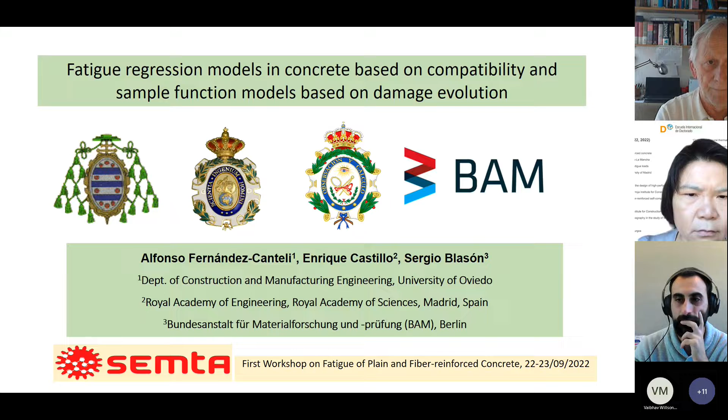As an index, I will introduce the problematic, and then present the phenomenological model of independent random results, which are based on regression and compatibility, particularly the basic SN model.

Then, as a counterpart, the phenomenological stochastic models of cumulative damage evolution, followed by some examples of application for both fatigue and fracture phenomena, and finally some very short concluding remarks.

The problem of the fracture mechanics characterization of plain and fiber concrete is difficult because this material is quasi-brittle, and so the weakest link principle is not valid to be applied in general.

The fracture process zone plays an important role in the establishment of the size effect, for instance, which was interpreted by Bazant as an intricate, size-dependent problematic definition of concrete strength.

There are different arguments to justify the use of fracture mechanics in the case of concrete and plain and fiber concrete, such as energy criteria, crack propagation, the necessity to avoid ambiguity in results interpretation, size effect, and so on.

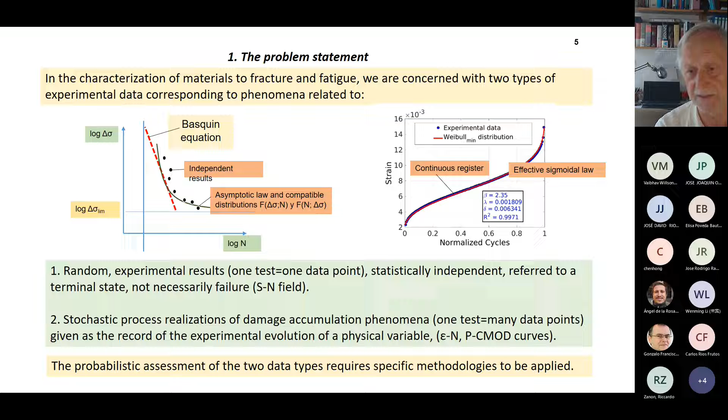In this case, we are handling, for instance, the epsilon versus N curves, or the P-delta curve, or the P-CMOD curve for this.

So in the first case, we consider it necessary to apply regression models, which are based on the compatibility between the distribution for the number of cycles given delta sigma, or the distribution of delta sigma given the number of cycles.

In the second case, we can apply a phenomenological model to define sample functions which, when normalized, can be identified as cumulative distribution functions.

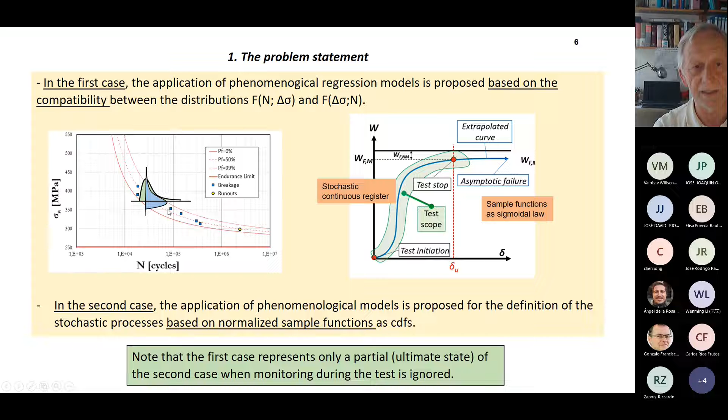Note that the SN field is a particular case of the second approach, because there the use of monitoring could be ignored and attention concentrated only on the terminal results of the test.

According to this, we propose the use of phenomenological models as justified by Freudenthal, which consider that by applying the fundamental rules of the theory of probability, many of the experimentally established relations between the principal variables can be theoretically deduced from the purely formal assumption of the existence of a statistical distribution function, in this case applied to cohesive bonds.

It is to note that Freudenthal is widely regarded as the founder of the field of structural safety and reliability, encompassing both the theories of probability and statistics and the theories of mechanics.

According with this, we propose to handle three cases. First, the assessment of the SN field. Second, the fatigue compressive test. And finally, the P-delta or P-CMOD test.

These evaluations are important because they provide information which can be used or must be used in the practical fracture and fatigue design analysis of fracture energy, scale effect, and also in the application to cumulative damage calculation.

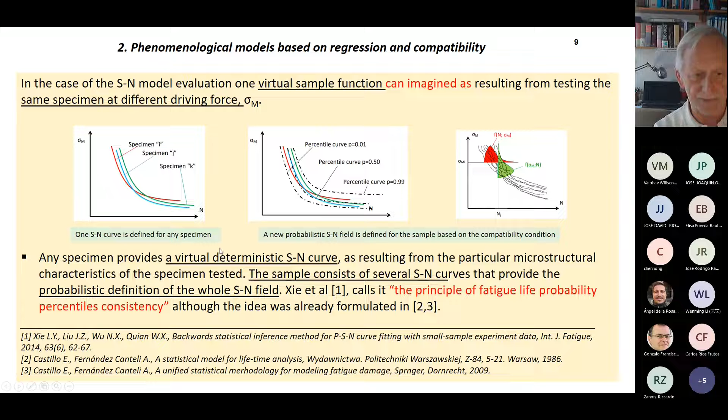So for each specimen we get a deterministic virtual SN curve, and from this set of curves for the sample we can determine the percentile curves for the whole SN field. This is what Xie et al. calls the principle of fatigue life probability percentile consistency, although we had already formulated this in 1986.

For the derivation of the model we have to consider the following conditions: physical conditions, which imply a limited tension range, delta sigma, and normalization to be applied for the different delta sigma levels in the principle of the weakest link.

But at the same time we also need to fulfill statistical conditions which imply dimensional consistency in the normalization, in order to accomplish the reciprocity principle implied in the accelerated test.

Then we also need to fulfill a stability condition in order to satisfy the location and scale transformation.

The limit behavior implies that we have to use an extreme value family, and we don't need to discuss which is the real distribution for the particular material tested, because we are only interested in low probabilities of failure. Asymptotically, any statistical distribution must be represented by one of the three extreme value distributions: Frechet, Gumbel, and Weibull.

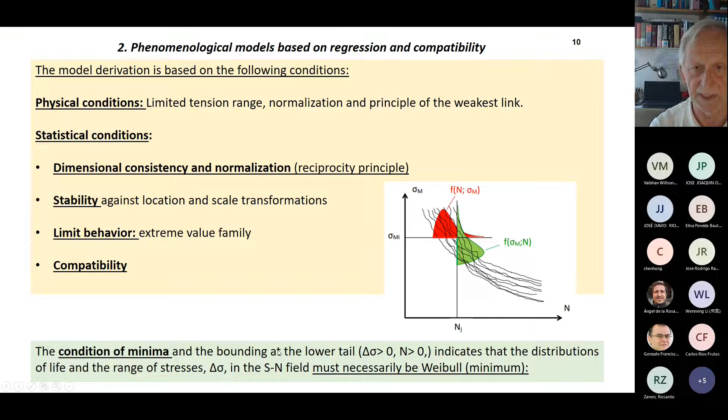Only two examples of the consideration of the compatibility, as presented by Freudenthal and Gumbel. This is exactly the publication of these authors, and the same of Bolotin, considering the compatibility, which is the necessary condition that the SN field must accomplish.

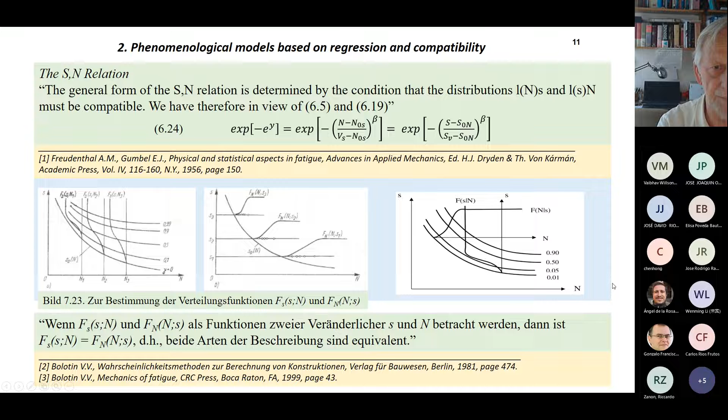So the question is that if we have a Weibull distribution as represented here, we can consider that lambda is only a function of the number of cycles in the case of the representation of the vertical distribution. In the case of the horizontal distribution, lambda and delta, the location and scale parameter, and the same for the shape parameter, must be only a function of the driving force delta sigma.

So by applying the compatibility, a functional equation results, as represented here, and the only assumption we have made is that the shape parameter must be the same in both cases. The solution of this functional equation, which is a part of the mathematics that could be considered in parallel to the differential equation, provides only two possible Weibull models for minima.

These are model 1 and model 2. But model 2 is degenerated, because the zero percentile curve is evolving to be the asymptote of this.

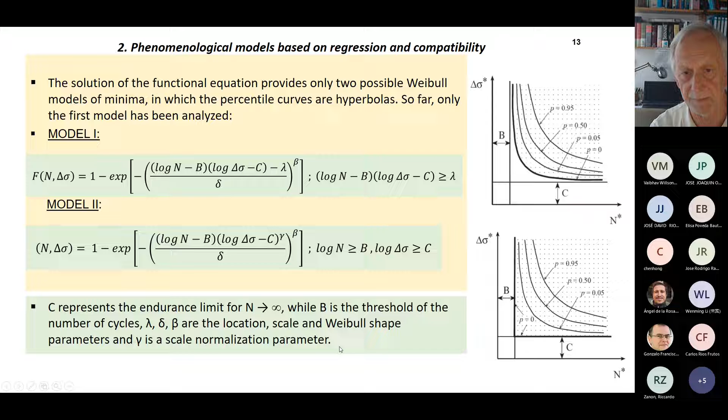In the second case there is another scale normalization parameter, but we will only consider model 1 as possible for this. So the model parameters are estimated in two steps.

The first step is estimating the asymptotes, and according to this we can normalize all the results in this way using the normalized variables, which is interesting because it summarizes all the information represented in the SN field as a single variable distribution, irrespective of the driving force.

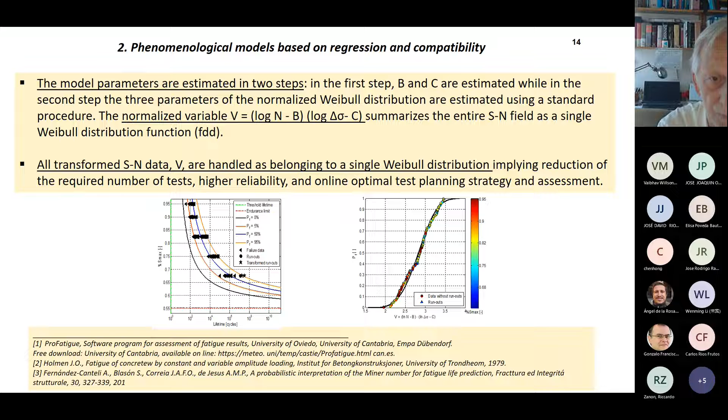We can assess all the results together, represented by a single Weibull distribution. This implies a reduction of the required number of tests, higher reliability, and the possibility of an optimal test planning strategy, as Sergio Blasón will present in the following presentation.

So we can relax the condition of the Weibull distribution, assuming the Gumbel, which is in transition between the Weibull and the threshold, when the shape parameter is higher than 6. In this case, we have a reduction of one parameter in the model.

The size effect can be considered included in the model in a very easy manner, although in the case of non-uniform distribution in the specimen, we have to resort to other models.

The runouts are included in the parameter evaluation using the expectation and maximization algorithm, and then the confidence interval of the percentile curves in the SN field may be estimated by applying the bootstrap method or using Bayesian techniques.

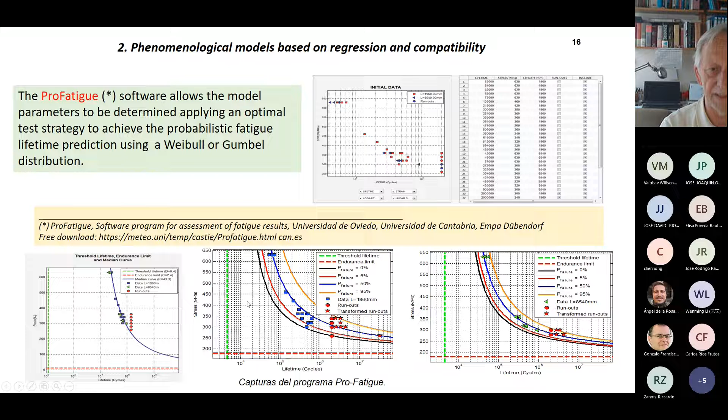According to this, we prepared the ProFatigue software, which allows the model parameters to be determined. This will be discussed in detail by Sergio Blasón.

This is only to mention that this model, called the basic model, has some weaknesses, as for instance, due to the absence of the upper limit of delta sigma, contradicting the existence of an ultimate stress sigma u, and the interpretation of the B parameter is not easy or fully understood, although Bolotin's model presents a similar parameter derived from micromechanical considerations.

This model is derived for constant stress level condition, for instance, for R constant. When the life prediction is intended for different stress levels, we have to extend the model. And the same when the non-uniform stress distribution in the specimen requires to be complemented with a generalized local model. All these problems have now been addressed using what we call a general model, which overcomes all the limitations of the basic model.

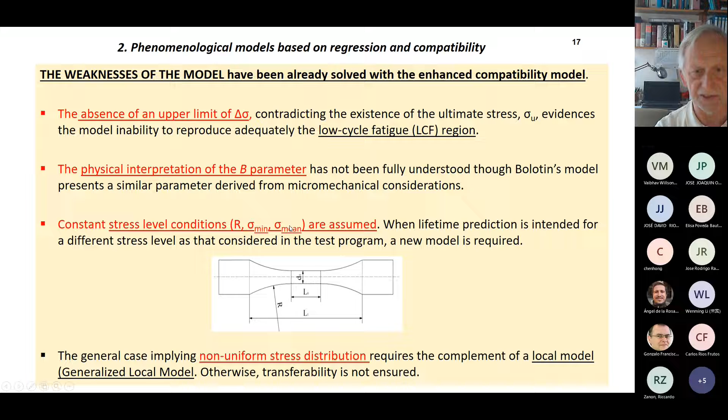And finally, only a reference, we can not only represent or apply the SN field for the delta sigma, but we can consider any generalized reference variable, for instance in multi-axial fatigue, as the Smith-Watson-Topper, Crossland, Fatemi-Socie, anyway, because they are based on the compatibility condition, and this compatibility condition is applicable to any material and also to any reference variable. It means any driving force.

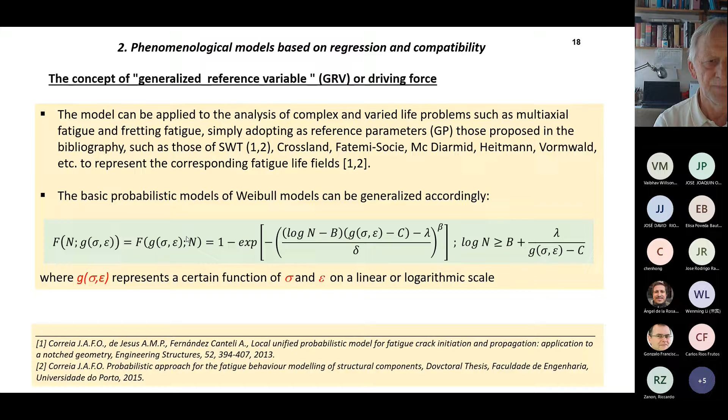So, according to the program, we are now discussing the phenomenological stochastic models of cumulative damage. The evolution of many cumulative damage phenomena, as for instance fatigue, fracture, wear, creep, etc., usually exhibits sigmoidal shaped curves, which are related to different physical magnitudes, as I mentioned, for instance vacancy concentration, acoustic emission, deformation, anyway.

Developing fatigue fracture phenomena phenomenologically has many advantages, because we can establish the fundamentals of the phenomenon based on a statistical basis.

We can profit from the experience already existing from statistical theory in this kind of function. We can derive simple analytical expressions which permit the interpretation, the physical interpretation of the parameters.

And we can also recognize the twofold character in cumulative damage when we are only analyzing the terminal reference state of the variables. In this case, we are predicting when the failure occurs, but we can also be interested in analyzing the evolution of damage in the fatigue process or the fracture process.

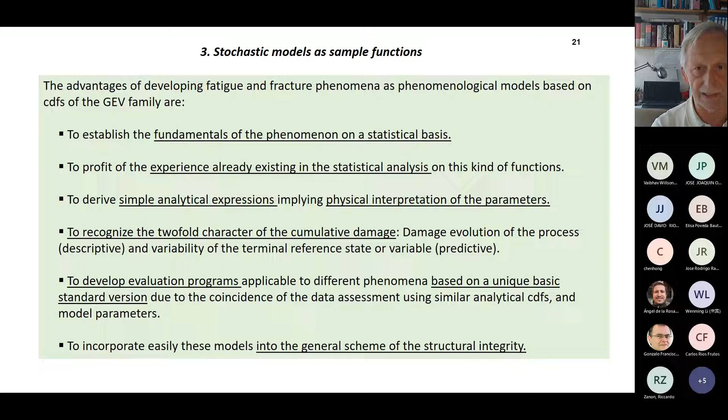So the proposed methodology consists in recognizing the lower bound and the upper bound of the record of the test. We have to consider adequately which are the scales in both the main variable and reference variable defining the phenomena. It means the logarithmic or the linear scale can give very different views of the phenomenon.

Once we recognize these both bounds, then we can use the normalization to transform the problem of this sample function into a cumulative distribution function, because according to statistical theory, the cumulative distribution function can be defined as a function moving from 0 to 1, in which the evolution is always increasing, monotonically increasing. Then automatically this can be defined as a cumulative distribution function.

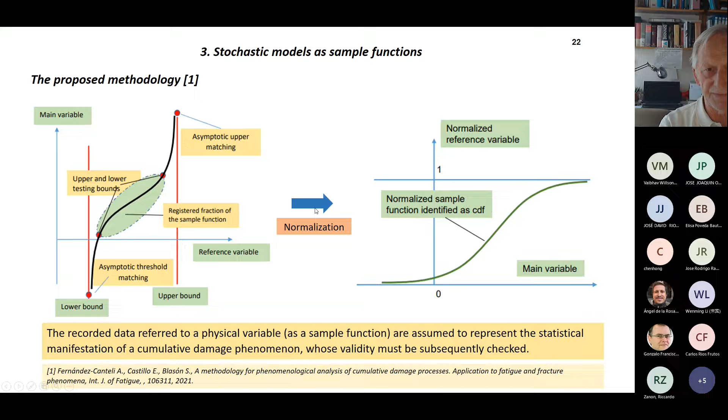Then the question is, which family can be used for representing this cumulative distribution function? In this case, we use three examples of application to define the problem we are discussing. The first one is the assessment of the fatigue results and definition of the SN field.

As mentioned, we use these models based on compatibility, which are regression Weibull models. The aims of this model are the following: first, to define in a probabilistic way the SN field, which is only referred to the ultimate state, which is usually the failure.

The second aim is that this conforms a basis for the probabilistic cumulative damage calculation. Without a probabilistic definition of the SN field, we cannot define the cumulative damage in a probabilistic manner. Then it is also interesting to get from the model the endurance limit, because we don't introduce in the derivation of the model the condition that the endurance limit exists. This is a requirement given directly from the functional equation.

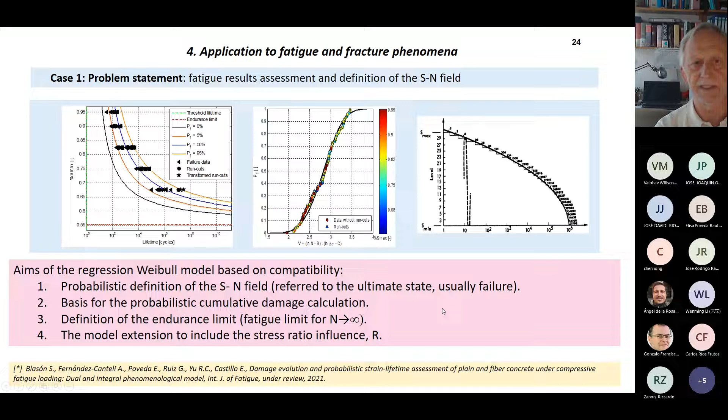Then it is also interesting to extend the model to include the influence of the stress ratio. According to this, this will be handled by Sergio Blasón in his presentation in detail, giving an idea about the advantages implied in the model.

In the second case, we are interested in analyzing the strain evolution in concrete under compressive fatigue loading from a dual perspective: one, only considering the prediction of the statistical distribution of the terminal state, and the other, the definition of the stochastic sample function for the different specimens. We are using the work of Poveda et al. in order to perform this study.

The aims in this case are, first, definition of the damage evolution and to extend this to any stress level of the SN field. In this case, we only dispose of results at a certain level, but with the normalizing property of our model for modeling the SN field, this can be extended to any stress level.

In this case, we have some experimental results, and this is the fitting using this methodology, which can be considered practically perfect. For different specimens, we find a certain scatter in the curve, so we need also to establish the ultimate distribution of the failure, and we can finally define the cumulative distribution function of this expected lifetime according to the Weibull model.

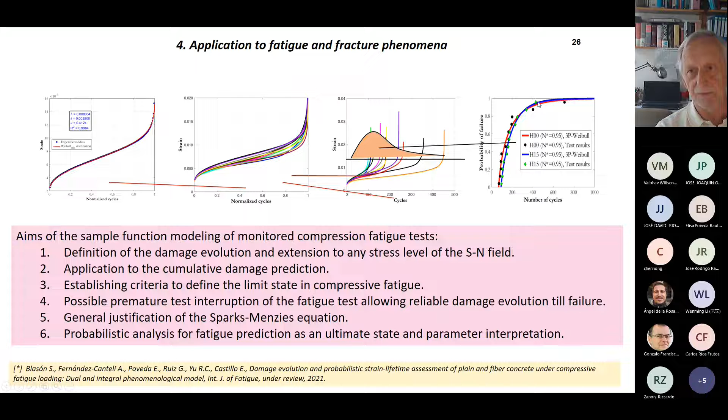Finally, this is the probabilistic analysis, as I mentioned, the distribution of the failure, according with the Weibull model. These are the results as an example for different steel fiber reinforced concretes and for different degrees of reinforcement. We see the quality of the fitting and also the scatter, which must be statistically handled to predict a representative damage evolution for the next specimen we test.

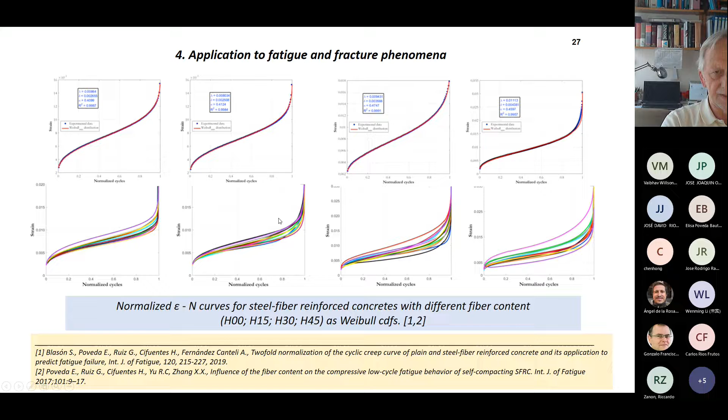So the complete assessment, as a dual approach, encompasses the analytical definition of the damage evolution, the probabilistic analysis of the SN field, and the probabilistic distribution of the single parameters. This means that if we repeat with different specimens, we can observe the distribution, the variability of the model parameter, with the advantage that these parameters are physically represented.

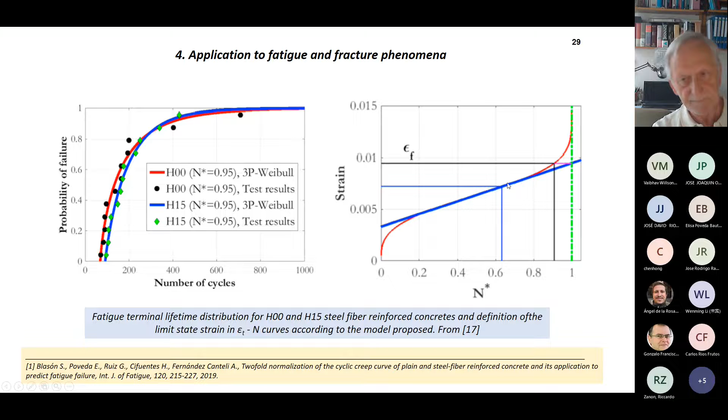Then, the restoration and prediction of the damage evolution in the running test allows this premature interruption. And we can see here the region where the Sparks-Menzies equation is applied.

Finally, this is not a fatigue case, but a fracture phenomenon. The asymptotic fracture energy and the specific fracture energy are determined by a test, a P-delta force test, or a CMOD record, which is censored at a certain point due to the test condition.

The importance is not only as a fracture, because it provides information, for instance, related to energy, which can be used afterwards for the fatigue design.

The aims of this phenomenological model are the analytical definition of the complete curve, not only from the one provided by the test, the interpretation of the model parameters, and defining the fundamental properties of the fatigue and fracture behavior, then a more reliable calculation of the specific fracture energy, because we are fitting all the curve and not, as we will see, only fitting from the last point of the curves at the interruption of the test.

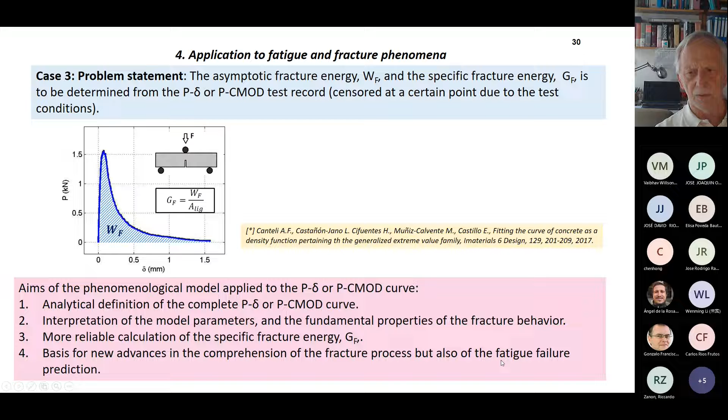And then we consider that this constitutes the basis for new advances in the comprehension of the fracture process, and therefore also to be used in the fatigue prediction.

In this case, we consider the sigmoidal shape of the energy in the advance of the test, and then with the normalization, we can consider that this sample function is a cumulative distribution function.

In fact, we are not directly using the energy, but we are considering the PDF. It means not the cumulative distribution function, but the frequency distribution. And this frequency distribution has an area equal to 1.

And then in this case, we can, using only 4 parameters - the 3 parameters of the distribution we are looking for, which happen to be a Fréchet distribution, and the other one, which is scaling the area so that the complete area under the curve must be 1, as statistically required.

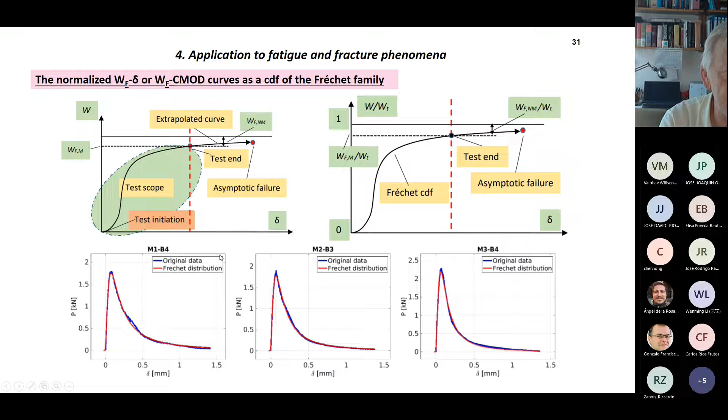And then we consider that the integral of the curve, the area under the curve, is extended to infinity.

And then according to this, the generalized extreme value family is considered in order to see which is the reliable or the suitable family of curves to be used in this case. We perform the considerations using Weibull, Gumbel, and Fréchet, and the Fréchet proved to be the adequate one.

This is possibly because the distribution of the curves - the tail of the distribution - must be, in this case, conditioned by a distribution which has a minimum, but is a threshold for maxima, which is bounded in the lower part of the curve, and then goes to infinity.

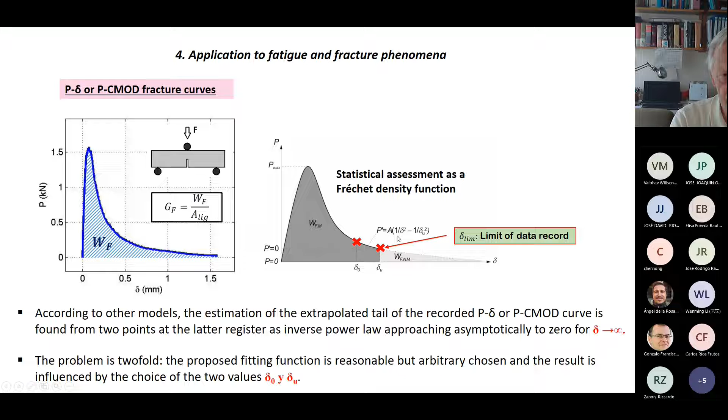And after the optimization of the parameters, we find an alternative to the current procedure, which is based on assuming an inverse power law curve for completing the part of the interrupted test in the laboratory. Instead, we are defining the complete curve, and therefore the extrapolation we consider must be more reliable than the current procedure used.

And the other question is that usually we can consider that this must be an inverse power law evolution of the energy, but according to the equation obtained with the Fréchet distribution, we see that it must be a combination of a power law and an increasing exponential tending to unity. It means that the Fréchet distribution is composed as a product of one increasing exponential tending to 1 and another power law which is reducing from infinity to practically zero.

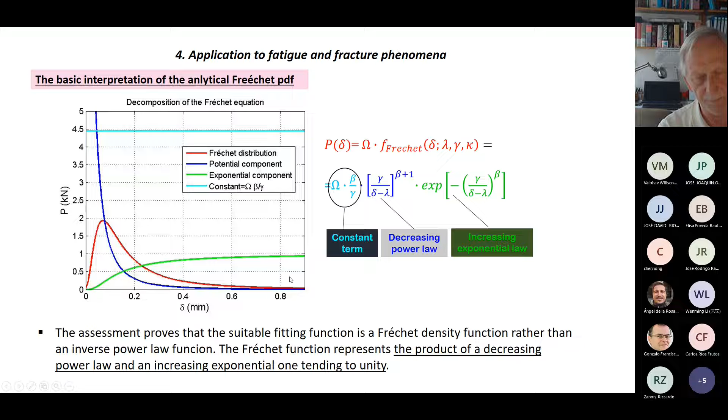And this must be perhaps giving us some information about the process which can also be applied afterwards in the evolution of the fatigue process in the material. And so as concluding remarks, this is only referred to the last.

So the proposed model should not be understood as a simple fitting proposal, but rather should be understood as a sample function which can be, once normalized, identified with one of the extreme value family distributions, which represents in some way the microstructural response of the material in the fatigue and fracture process.

So the information collected in the test record sometimes represents only a small fraction of the complete damage phenomenon. But because we are identifying this with a cumulative distribution function, the procedure can complete this curve, even if we are considering only a fraction of the complete procedure.

And then sometimes, because the shape of the cumulative distribution function is determined by the shape parameter, when the Weibull parameter is less than 2 or even less than 1, we have no sigmoidal shape of the cumulative damage sample, but this only serves to justify phenomena which are not observed as sigmoidal shape phenomena.

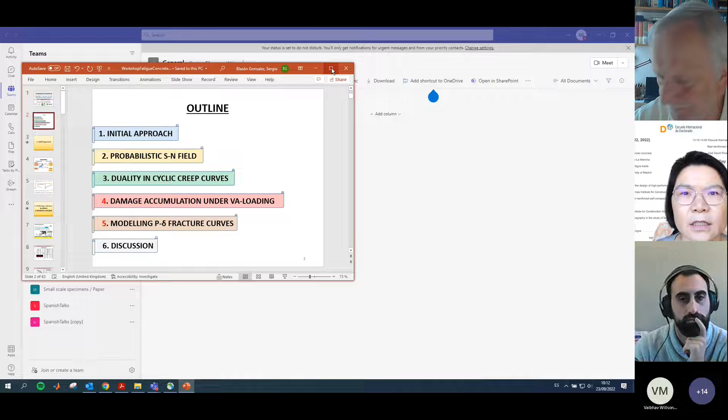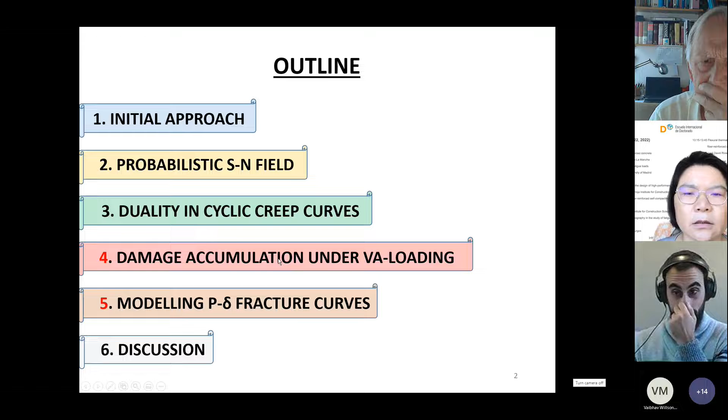Thank you, Rena, for your introduction. Can you watch my screen? Perfect. So, first of all, sorry, because I changed a little bit the original title of the talk, because we were talking about evaluation using MATLAB, but it's not necessary to use that software in order to evaluate the data. Basically, this talk is a continuation of the previous one by Professor Fernandez Canteli.

The intention is basically to apply the phenomenological models that he was introducing in the first talk. And of course, I should remark that this is a working cooperation not only with Professor Fernandez Canteli, but also with Professor Enrique Castillo.

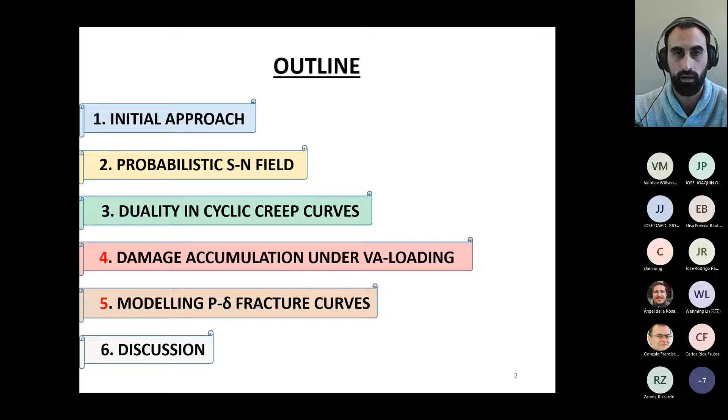Well, this is a summary of the talk. Firstly, I will introduce shortly the topic, and then I will give you some examples of how we use the S-N model in order to evaluate some experimental data. Then I will go to the duality in cyclic creep curves. I don't know if we will have time to go into the fourth and fifth topic, the damage accumulation under variable loading, and also the modeling of P-delta fracture curves.

But in any case, maybe I can give you some small slides, and then we can talk about it during the discussion time. According to the topic, as Professor Fernandez Canteli mentioned before, we defend the interpretation of fatigue damage under two different perspectives. The first one is when we don't have any information about the evolution of the damage during the fatigue test, for example — I'm looking for the pointer, sorry — when we don't have any information about the evolution of the damage, which could be referred to the crack size, the emission, acoustic emission, the strain, or whatever.

Then we are only able to evaluate the terminal state. It could mean basically the failure, or maybe some particular limit state that we can define in advance. On the other hand, when we can monitor the evolution of the crack size, the strain, or whatever, we can do a complementary evaluation of the data, and this is more or less what we will see in this presentation.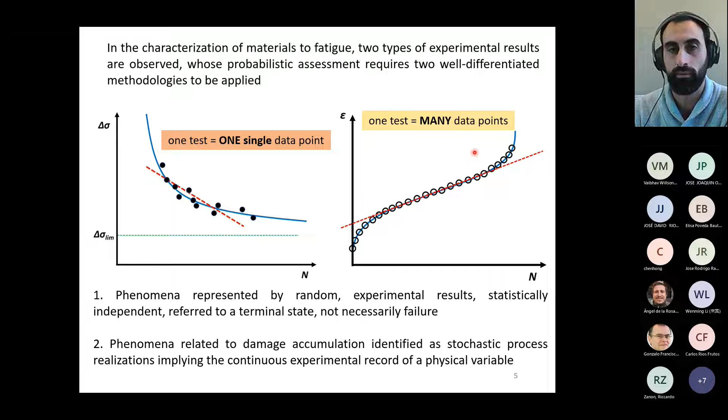For example, one example of the terminal state evaluation is the typical SN field, when we have many data, but we can say that every single test refers to only one particular point. So this means that, for example, we analyze this particular data under some specific stress level, and then we basically record the number of cycles till failure. We can do the same with the rest of the experimental data. On the other hand, when we can, for example, monitor the strain level along the cyclic creep curve, we collect basically many different points along one particular test. So we will see in this presentation the methodology that we propose to evaluate each of these approaches.

First of all, I will explain how to evaluate the SN field from a probabilistic point of view by using the model that was explained by Professor Fernandez Canteli before. In this case, the model is implemented in a software called ProFatigue, and I will give you some details about that in the next slides.

But in order to show you how to use the software and how to implement the model with some experimental data, I would like to take advantage of the experimental data collected by Holmen more than 40 years ago. I think also Professor Ruiz mentioned this work yesterday in the first talk. He collected a lot of different results using plain concrete specimens. In this case, I will be focused on the specimens which were tested under constant amplitude loading. He was analyzing two different kinds of tests. The first one referred to S-min equal to a constant value, so basically we can accept that the load ratio in such cases was practically zero, so constant.

On the other hand, he was also evaluating some specimens under the same mean load. But in this case, the loading ratio was not constant, so I will refer only to this first case.

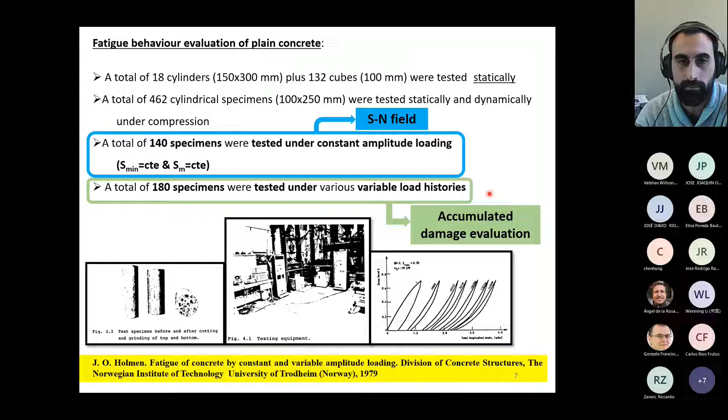Basically, these were the results that he got when using the plain concrete specimens under the same minimum load during the test. He was using a frequency constant of 5 Hertz. And here you can see the stress level, referred to the compressive strength of the material.

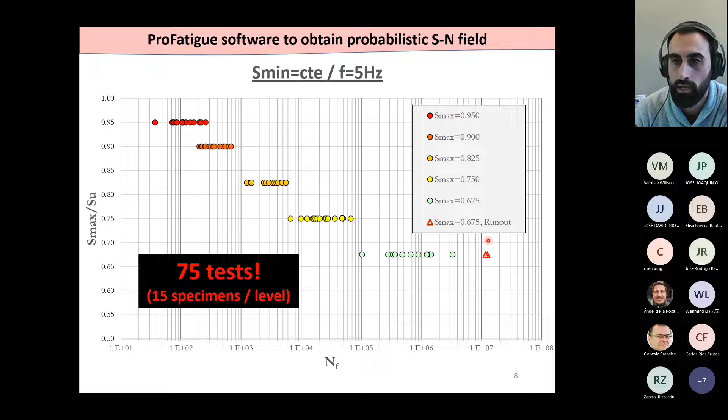As you can see, there are many experimental data. In total, 75 tests were tested. He got basically 15 specimens per each single loading level. Here you can see the numbers referring to the loading level. And in the lowest loading, 3 specimens were not broken. That's why we refer to them as runouts.

According to the typical models implemented in many guidelines and standards, we can basically analyze the data using a simplistic, in our opinion, model that consists of a linearization of the relationship between the lifetime and the stress level. If we consider the lifetime in a logarithmic scale, we can use a linear relationship between the number of cycles and the stress level.

According to this, we can get an analytical expression that we can transform into a straight line, just by taking the logs. We can more or less identify the mean value of the life according to each level, but from a design point of view, we think that it's not practical or useful, because usually we don't take care about the mean value, but we should refer to the minimal percentage of failure, because of course we cannot think about a component with a percentage of failure around 50%.

Of course, we should minimize the probability of failure. That's why we should always take care about the minimum lifetime that we can expect under some particular loading level. So that's why we are a bit skeptical about this kind of analysis where we are focused on the mean value.

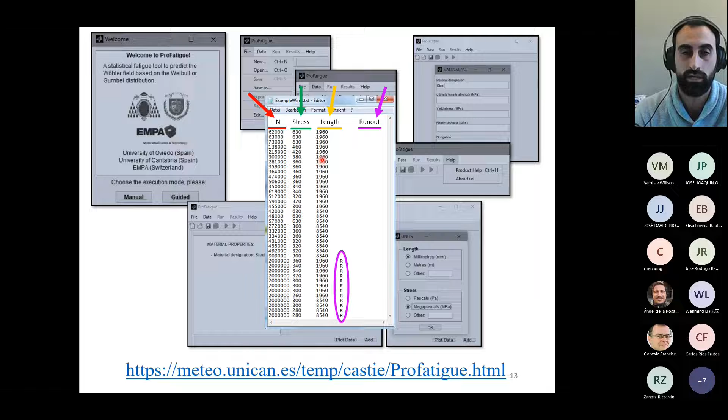So this is some kind of information - for example, if you are collecting data from different sizes, as Professor Ruiz mentioned before, you can give the information to the software, and then evaluate both samples with different sizes, which is, in my opinion, also a very good advantage compared with the typical models that you can find in the literature.

Coming back to the analysis of the Holmen data, this is basically the kind of percentile curves that we get when we evaluate this test. I am representing the percentiles referring to 0, 1, 5, 10, 50, and 99% probability of failure. Of course, the mean value, or the percentile referring to 50% probability of failure, is more or less in the middle point at every single loading level.

But as I was remarking at the beginning, we should take care and pay particular attention to the lowest probability of failure. That's why it's a good advantage to have this kind of model in order to characterize the lower probability of failure.

Something important to note is that we can use the model to identify some kind of bias when we analyze the data. What I mean is, for example - I am more expert in metals, but here, if I am not wrong, we can probably identify some kind of plasticity effects at the highest level, because we are very close to the compressive strength of the material. Even though we are working with concrete, in my opinion there could be some minimal plasticity effects in the affected zone.

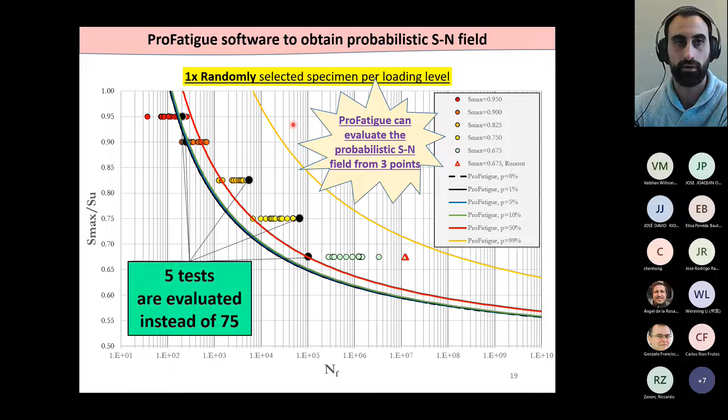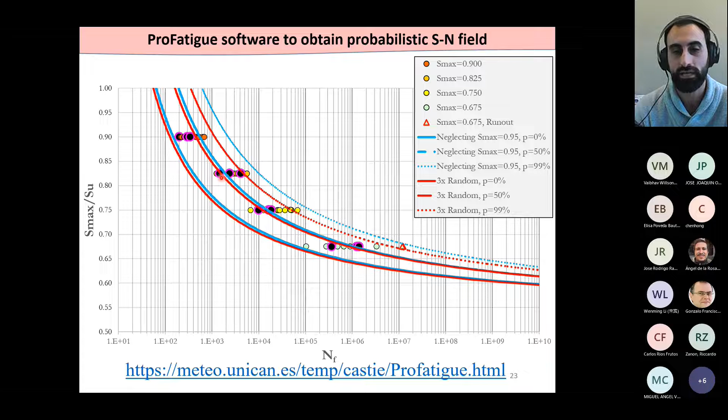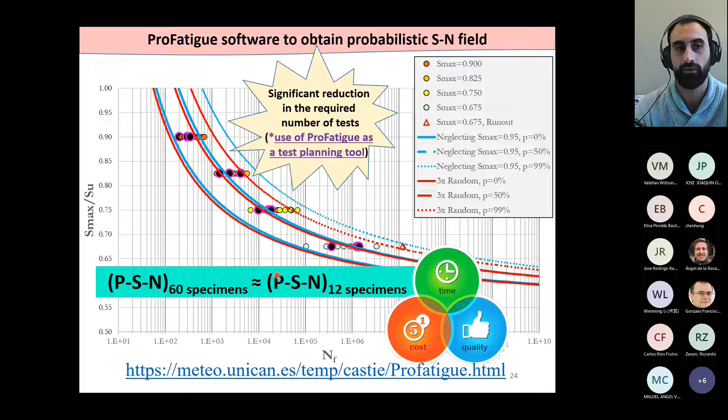Once again, comparing the evaluation considering all results apart from the highest level, and the one considering only 3 specimens per loading level, we can see that all the percentage curves are almost the same. This means that instead of using 60 specimens, we can obtain basically the same results using only 12 specimens, which means we can reduce time and cost while obtaining the same accuracy in terms of probability analysis, which is very good news for us.

Then I would like to go to the evaluation of the cyclic creep curves. For this, I will take advantage of results from our colleagues at Castilla-La Mancha, using results referred to in the paper by Poveda et al. Here we are evaluating concrete under compressive loads with different quantities of steel fiber - the case of plain concrete and also different quantities between 50 and 60 kilograms per cubic meter. What our colleagues were collecting in this test was the strain according to the number of cycles along each test.

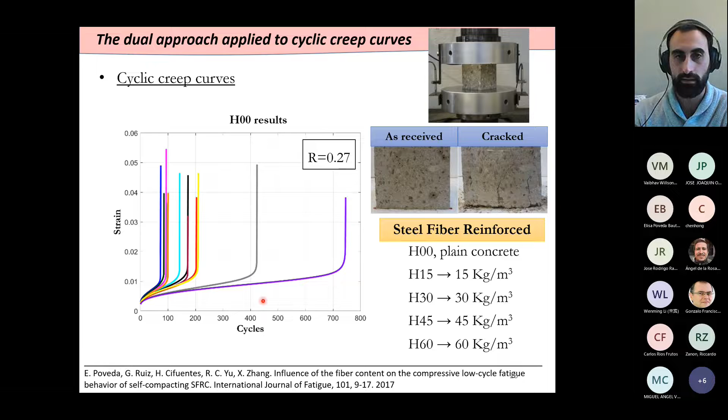Going back to the dual approach that we are defending, we can analyze the data taking into account just the terminal state, getting some kind of distribution function according to the failure points. But at the same time, we can use the information recorded around the test to characterize this damage accumulation behavior, promote some analytical expression to characterize it, and from that point be able to do some kind of estimation in advance.

This is basically what we propose in our last paper, also published this year. As mentioned before by Professor Canteli, we are able to reproduce the whole curve we collect during the test, and at the same time, at some particular point, we are even able to interrupt the test and get a very good approximation of the number of cycles until failure, as shown here. But let me first show you some of the results.

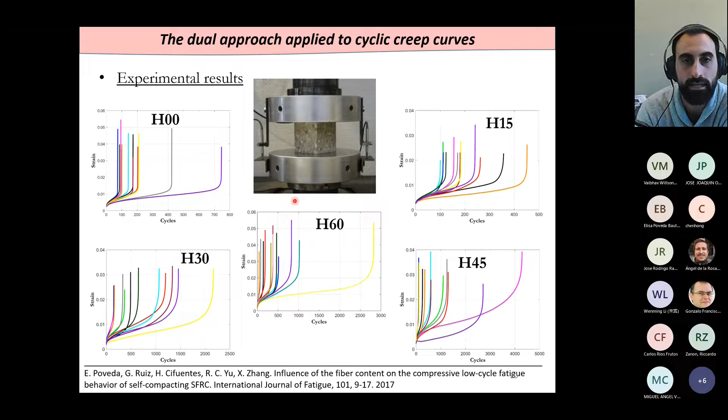Here we are representing all the data collected by our colleagues in Castilla-La Mancha. The phenomenological model that we propose is this one, which is based on a Weibull distribution for minima.

So we have 4 different parameters, which allow us to represent every single curve. Three of the parameters refer to the Weibull distribution: the location, the scale parameter, and the shape parameter. And then an additional one refers to the number of cycles till failure.

One can think, okay, we know the failure information, but not really, because usually we interrupt the test when we arrive at some particular strain level or some terminal condition. Usually the specimen is not totally broken into two pieces. That's why we implement this number of cycles parameter, which represents basically the asymptotic value in terms of number of cycles at the end of these curves.

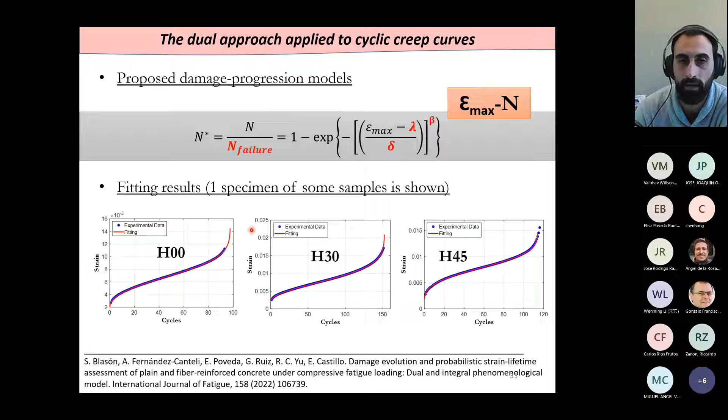As you can see in these 3 examples, we are able to reproduce the monitoring data in a very good way. Under my point of view, the fitting curves can be considered almost perfect.

So all in all, basically we could collect this information in order to anticipate or estimate which could be the optimal quantity of fiber, to get the best solution or the best combination between the matrix of the concrete and the fiber content, in order to get the best fatigue performance of the material.

And once again, we can use this methodology to anticipate the number of cycles until failure, because we prove that even when we are only considering, for example, 50% of the initial curve, we are able to estimate the number of cycles until failure in a very good way. This means that maybe we can save time and take advantage of the monitoring recording during the test.

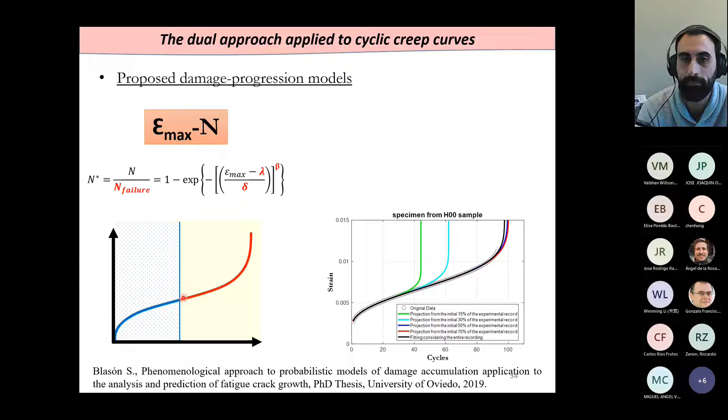We know that during the test, the slope of the strain versus number of cycles curve, which is basically the strain rate, is decreasing at the beginning until the inflection point, where the slope starts to increase again. So maybe we can combine this information with this approach in order to, for example, characterize the inflection point and interrupt the test at that moment, and then maybe use the same specimen to do some kind of variable loading analysis.

Then, okay, this is more or less a summary of both approaches: one considering the evolution of the damage along the stages of each test. From this point we can basically do three different analyses. The first one is to establish some limit state of the strain level, which was also commented on by Professor Witt yesterday.

We can also analyze the behavior of the parameters and try to correlate them with the quantity of fiber. And as I mentioned before, do some kind of estimation of the number of cycles before the proper failure of the specimen.

At the same time, if we collect this information along with information coming from different stress levels, we can take advantage of the ProFatigue software to evaluate this data. We can combine both approaches to have a very good representation of the general behavior of the concrete.

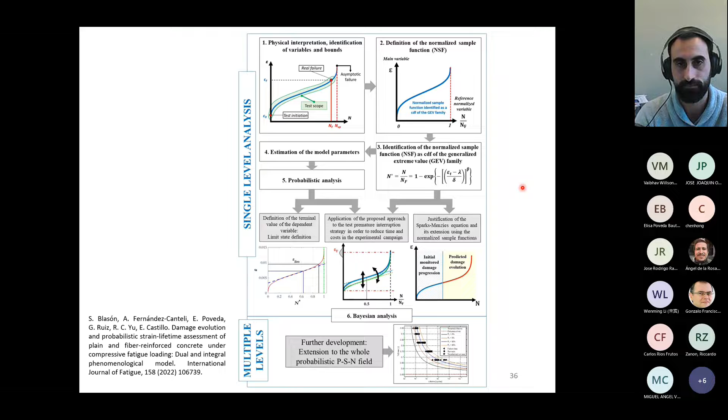Now I will go quickly through this topic referring to damage accumulation under variable loading. I don't know if you are familiar with this kind of rules referring to damage accumulation. Probably the most known is the Miner rule, but there are also non-linear rules like the one from Marko and Starkey, and many others published in the last 70 years.

But all in all, when we use one of them, it doesn't matter which one: for example, if we get a result referring to damage equal to 0.6, what does it mean? Could it predict how far the break point is? In our opinion, that is not possible.

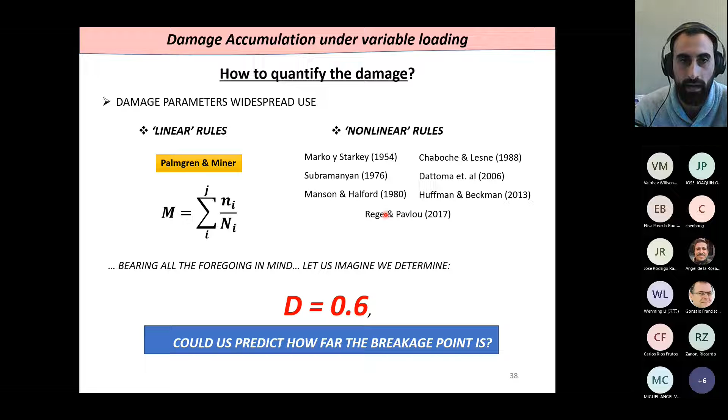That is why we promote using this kind of rules from a probabilistic point of view. We can make use of the ProFatigue software, some kind of analysis concerning the V variable, in order to correlate the Miner number, for example, with the probability of failure. This is something you can read, if you are interested, in our paper published 6 years ago.

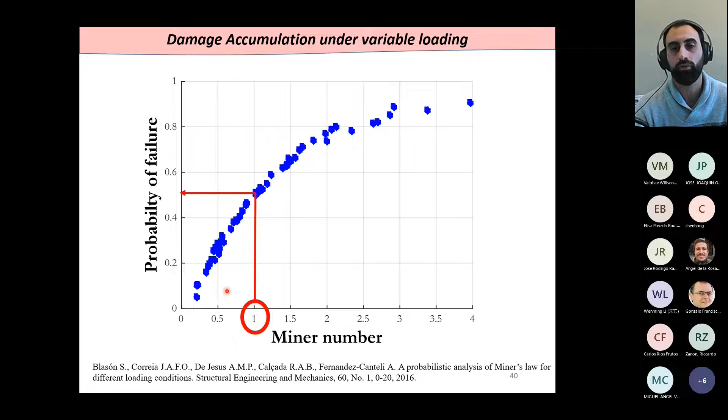Basically, we know that, for example, the Miner number equal to 1 is related to the 50% probability of failure. But what about the 10% probability of failure? Of course, we can do this kind of analysis in order to reproduce in a better way this kind of damage accumulation.

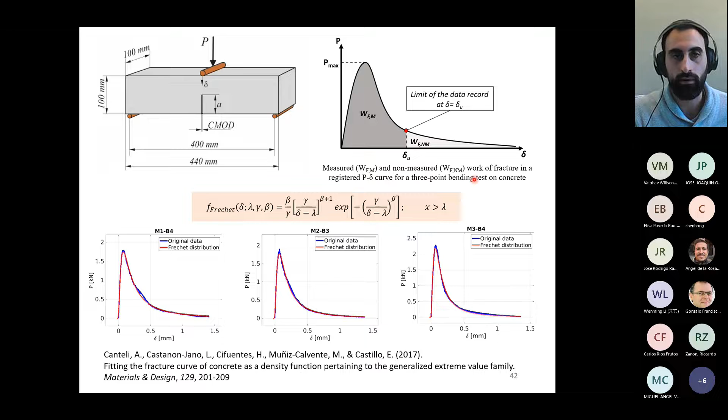This was my presentation. So if you have any question, please let me know. Thank you very much, Sergio.

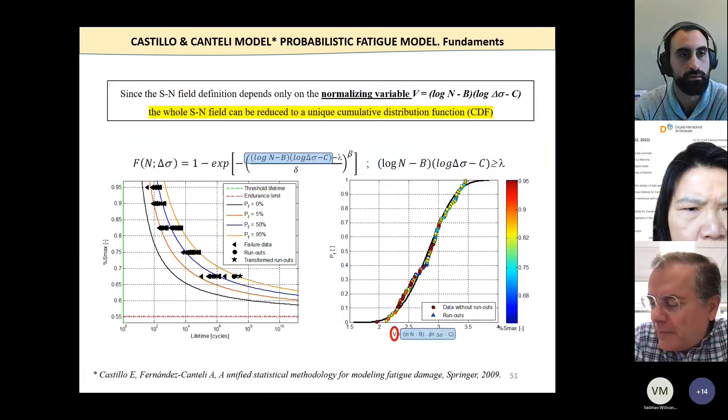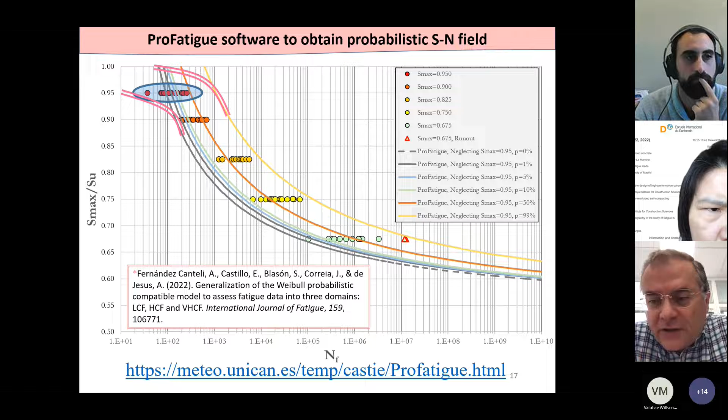Thanks. I would like to know, because when you were analyzing the SN curves, you are saying, okay, the ones in which we are reaching the highest maximum stresses, we are going to assume that they have some plasticity and so on, so we are not relying on them. So what if the ones you don't rely on are wrong for another reason? Because, for instance, you have some phenomenon like maturity induced by fatigue or whatever. So what I mean is, is it fair to dismiss some set of data just because you have an intuition that they are not valid?

Yeah, it's a good question, and probably my answer is it depends on your knowledge about the material. In my opinion, if you are able to anticipate some kind of bias in the condition during the test, I think you should take advantage of that and remove the evaluation. But in any case, even if we consider, for example, this data at the highest levels, we are obtaining a probabilistic SN curve which is, let's say, more conservative, but for us, that's not a problem in principle.

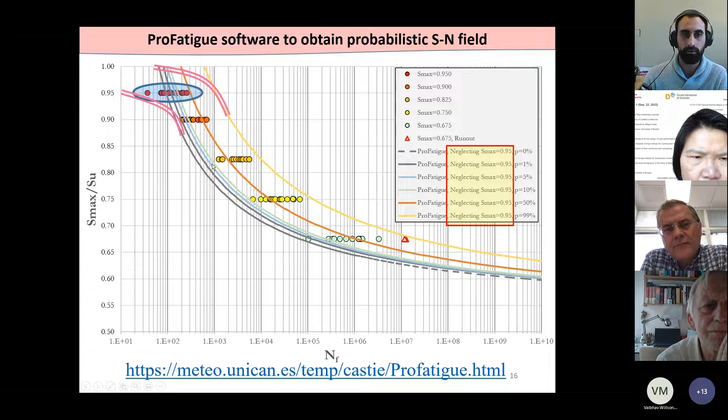What I mean is, for example, when we compare with the other one neglecting the highest level, of course the scatter is lower, but also the percentile corresponding to the 0% probability of failure shifts to the right. Which means that if we consider the original one as the reference, we are under the safe condition, let's say. So for me, it wouldn't be a problem. I don't know if I am answering your question.

No, yeah, I mean, of course, yeah. The only thing is that in these type of models, which are phenomenological, we should also consider that there may be some type of changes within the specimen, within the microstructure or whatever, of which maybe we are not completely aware. So, but I don't know, because as they are phenomenological, they are there because they respond to something. So later on, if we apply, I mean, statistical models are right, but at some point, maybe there is some divergence from what is happening in reality. I don't know. How can this be implemented?

But I have two comments about that. The first one is, I don't know, you know much more than me about concrete for sure, so I don't know if it's really realistic to consider such a high level when we are evaluating concrete, because in principle it shouldn't be the case that some kind of structure is under such high conditions. I don't know, but I have no idea.

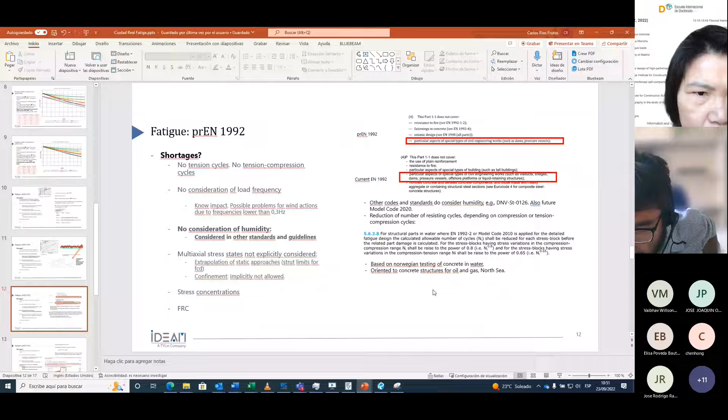Well, first of all, I would like to thank Angel, Rina, Gonzalo, and everybody from the UCLM for inviting me to this very interesting symposium.

I would like to say that my presentation is going to be a little bit different from the impressive presentations we have heard this morning, because from a practitioner engineer's point of view, I'm highly involved in the design of heavily fatigue loaded structures.

What I would like to present is the novelties, what has changed in the new Eurocode, which is now almost finished. Right now it is a draft. It is not finished, but it is almost finished.

I am a member of TDA 8, which deals with fatigue of concrete and reinforcement. I've been highly involved in the writing of the corresponding chapters of the new Eurocode regarding fatigue of concrete.

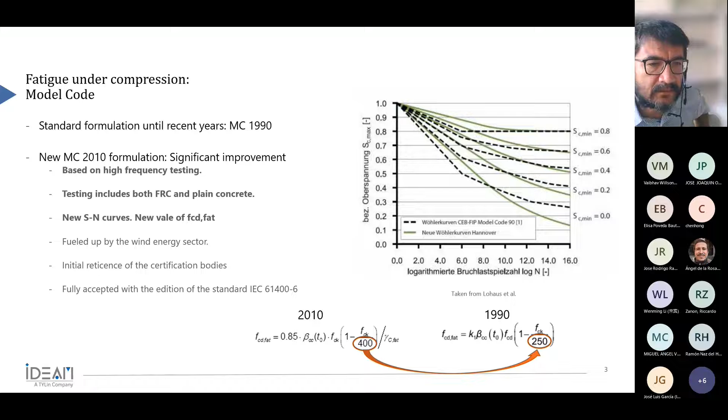This new formulation in Model Code for fatigue of concrete under compressive cyclic loads was fueled up by the wind energy sector, mostly by people involved in the design of concrete support structures for wind turbines, because, as you know, these structures are very highly fatigue loaded. Fatigue is a very important topic in the design of this kind of structure.

People from the sector wanted a new formulation because everybody knew that the Model Code 90 formulation was very conservative.

You can see that for Model Code 90, a lot of cross sections of the tower do not comply with the condition that the damage shall be less than 1. But with the new Model Code, every cross-sectional tower fulfills the verification. So this is an improvement because it implies a saving of materials, a reduction of thickness of concrete, etc.

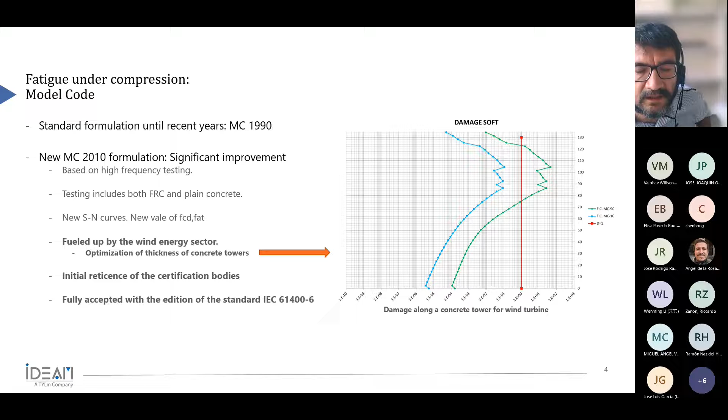What we have now in the current Eurocode is not superseded, because as I said, the new Eurocode is not ready, it is a draft. The current Eurocode has a slightly different shape of the SN curves, but the reference parameter FCD FAT is the same as in Model Code 90. We can see that the formulation is the same. What does it mean?

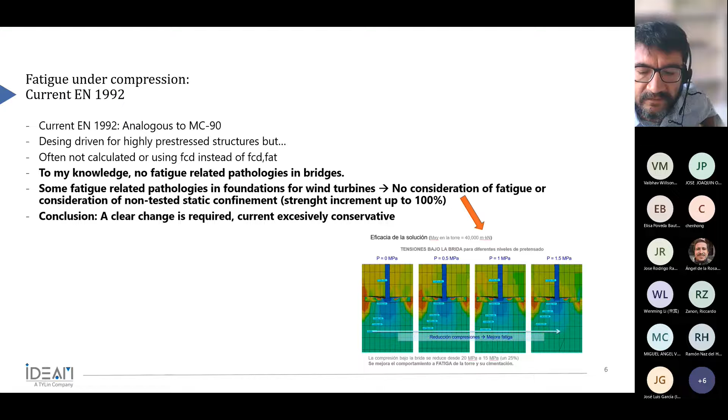So, just speeding up a little bit, the main modification in the new Eurocode is to change the SN curves of concrete under compressive loading. The approach has been that the SN curves keep the same shape, but the reference parameter FCD FAT has been changed, and it is not the same as in Model Code 2010.

Somebody out of the working group, the people working on fatigue, changed it. It's almost the same but with some additional coefficients. The formulation is very similar to the general formulation for the design strength of concrete.

This change hadn't experimental support, and there were some opposition from the members of TG8, including myself, because somebody from upstairs changed it without any experimental support. You can agree with the SN curves from Model Code 2010 because there was experimental support, but in this case there was not. So there was some opposition.

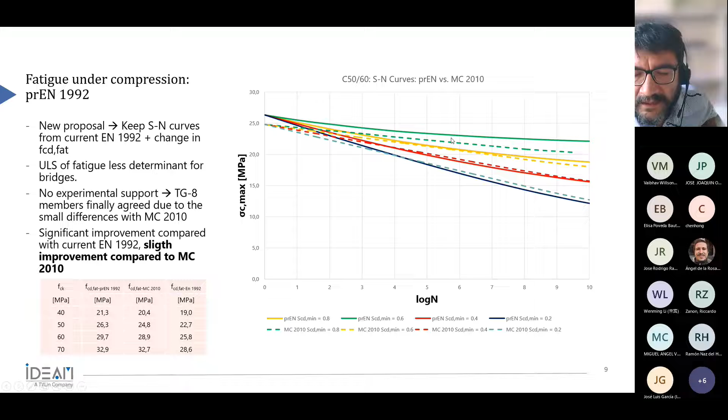You can compare here the yellow line, the dotted line, and the continuous line, and they are almost matching along the whole number of resisting cycles. The same for the red, the same for the blue. Of course, in the green SN curve from the draft, there is an improvement compared with the SN curves from Model Code 2010, but this is for a very unusual case, which is when we have a very high minimum compressive stress in the cycle.

So it was accepted, the new formulation was accepted. As I said, there was a lot of pressure, and there were more comparisons, more verifications, etc., and the differences between the proposed formulation for the draft and the formulation in the Model Code were almost non-significant, or negligible.

So this was the main modification regarding fatigue of concrete, both plain concrete and fiber reinforced concrete, because as I will comment later, there are no differences between plain concrete and fiber reinforced concrete in the formulation of the draft of the new Eurocode.

So, as I said, this is the most important novelty. There are others, but they are related mainly to reinforcement and other things not strictly related to fatigue of concrete under compression or under any other kind of stress state.

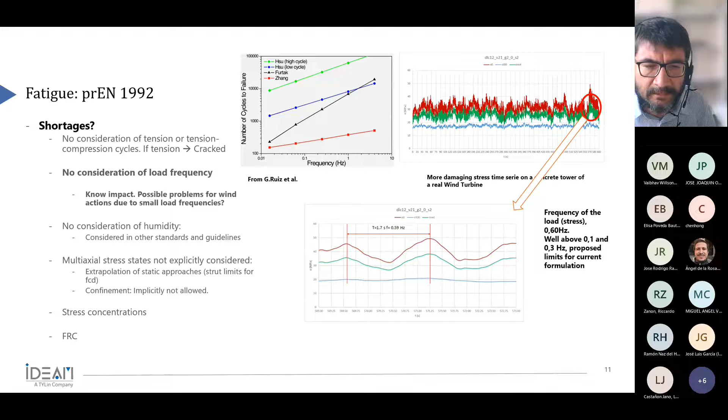Another shortage that it was decided not to include was the humidity, the content of water in concrete.

There is some contradiction, because some people said that this Eurocode is not going to deal with offshore structures. If the new Eurocode doesn't deal with offshore structures, no problem with concrete in water. But this was stated in the current Eurocode 2 - a particular aspect of special types of civil engineering works, offshore platforms for instance, or any concrete structure in close contact with water. But in the new draft, offshore structures or liquid retaining structures have been removed. They are not mentioned.

And of course there are other codes and standards, like the recommendations or guidelines from the certification body, DNV, ST0126, which deals with concrete in water, and implements a reduction of the resisting cycles if the concrete is in water and we have compressive cycles, and a larger reduction if the cycles are compression-tension.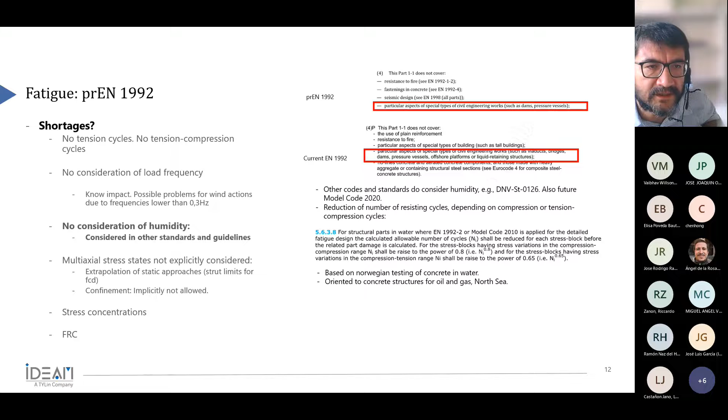And it was decided to let it out, not include this humidity aspect. Another thing is the multi-axial stress states - I'm finishing - they are not explicitly considered.

And there is a clear extrapolation of static approaches, strut limits for FCD, etc., and also for confinement. Now, for instance, when you are checking the compression strength due to shear in concrete, you are going to apply the same reduction factor due to transverse tensile stresses, to transverse cracking, etc., that you use for static cases, and that's all.

According to my knowledge, there are no tests or experimental background, or minimum experimental background, regarding these multi-axial stress states when you are dealing with fatigue.

Of course, you can take advantage that in the new Eurocode there is a refinement in the analysis, in the assessment of the shear. And now the reduction of strength due to diagonal or perpendicular tensile stresses to the main compressive stress - these reduction factors are refined, they are more accurate, but they are always static. You can't trust these coefficients for cyclic load.

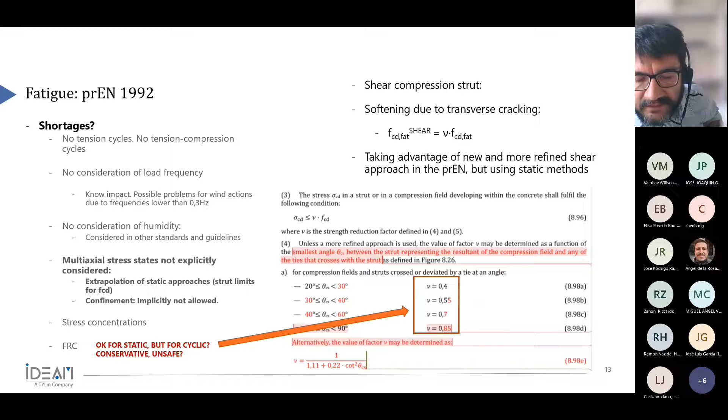Of course, maybe they are too conservative, or maybe they are not. But for now, this is the only tool that we have.

Another thing which is important is the confinement, because you can take advantage of confinement in a lot of details of a lot of structures, mainly for wind turbines. But can you take advantage of the confinement of the concrete for fatigue? Is there any testing, any experimental background? To my knowledge, there is not. And people are using it.

A lot of problems in foundations for concrete foundations for wind turbines came from consideration of a static confinement, which almost doubled the strength, the fatigue strength of concrete. But there is no experimental background.

There is a recommendation in the DNV which limits the confinement, if you are dealing with fatigue, to 30% of the fatigue strength, of the FCD FAT, let's say, and this also came from this extensive testing campaign in the 80s for the offshore concrete structures built in the North Sea in Norway. This could have been excluded from the draft because people thought that we are relying on just one recommendation, from just one code, and that's that.

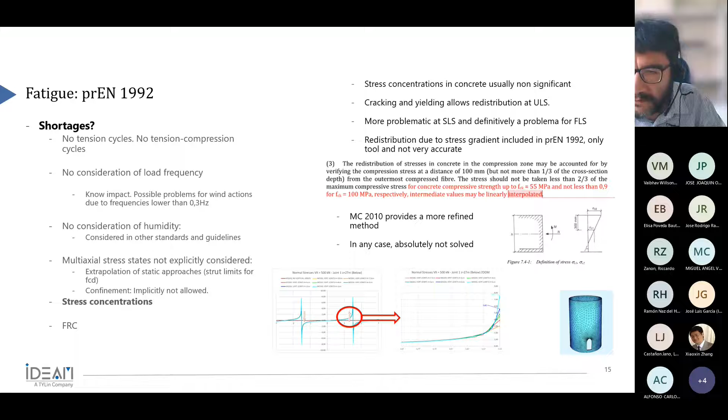And last, there is no direct reference to FRC, fiber reinforced concrete. There are no references, no recommendations. They don't provide a different SN curve, etc. I know this is a very complex field, but I think it's already known that usually fiber reinforced concrete has a better behavior under fatigue loads than plain concrete. But as I said, the SN curve is the same for plain concrete and FRC.

And of course, for multi-axial stress states, FRC shall improve the behavior of concrete. But sometimes you find other problems. Now we are dealing with a fiber reinforced concrete tower for a wind turbine, and we are thinking, we have fiber reinforced concrete, we have SN curves from tests, that's everything okay. But we also have zones where there is high confinement. Can we mix the improved SN curves of the fiber reinforced concrete with the confinement?

There is no answer. There is no testing, no experimental background, etc. So it was decided not to include any reference to fatigue of fiber reinforced concrete, because a lot of people thought that it is not absolutely clear what are the approaches, what are the SN curves, etc.

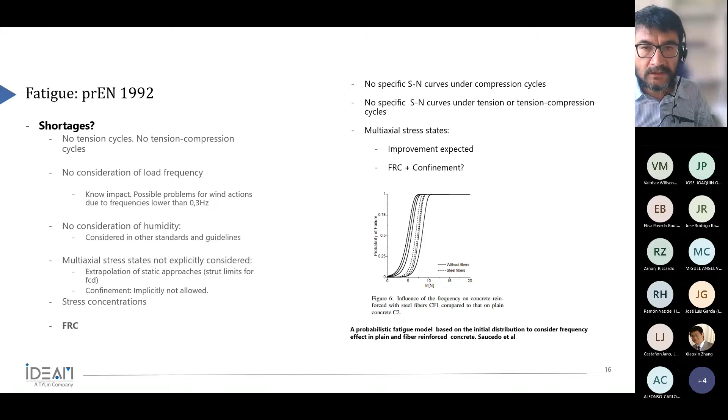Seems really from the Eurocode, there's a lot of distance from the research and the practice, right? Now our session is open for discussion. Let's see, the discussion is open for all three talks.

And I remember that Jose Joaquin had one question. Are you there, Jose Joaquin? Hi, yes. Well, my question was for the previous presentation, but in any case, thank you to the three speakers for their presentations.

My question was for Sergio Blasón, or even for Professor Fernández Canteli, because he's also an author of the method. I'm very interested in your model, and in fact I have applied the model for the fatigue creep curve in our study about the size effect in fatigue of cubes. When applying the method, I know how to fit this generalized extreme value distribution to a complete curve.

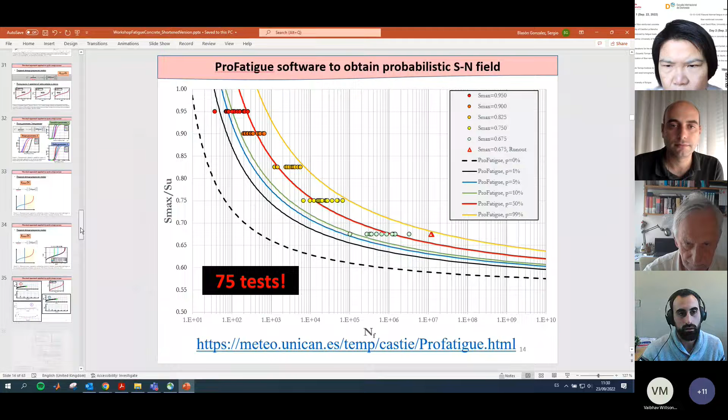Yes, yes. So we are referring to this kind of data, let me share the screen. We are speaking of this kind of data, right? Yeah, exactly for that case. So I think in our experience, because you already know we were playing with these results from Elisa and your colleagues, we were exploring the possibility of taking advantage of the registered data and trying to do some kind of extrapolation in order to characterize or try to anticipate the number of cycles until the end. So I don't know if this is, in this regard, your question. Yes. So basically, because the origin, also the model is here, this analytical expression.

Basically here we only need the number of cycles that you were recording, also the strength that you are measuring. And from that point, if you apply the fitting curve, let's say, you should be able to characterize the complete curve. From that point, you will obtain probably the 4 parameters. And for example, the one which is here in red color, the number of cycles, should be the hypothetical number of cycles till failure that you could use as your anticipated failure point.

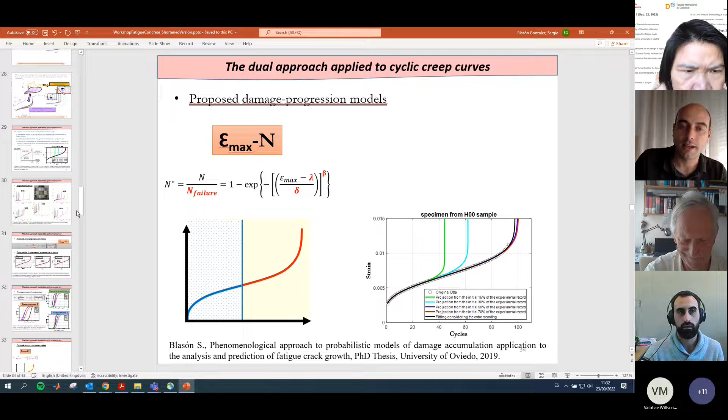But I don't know if that was exactly your question. There is something more deeper. For example, I have a group of complete tests. You can obtain those parameters for each one of those tests, and you can get like a master curve that represents them all. If you normalize the variables, all those different curves collapse to only one. So that's very interesting. However, in an incomplete test, how do you know?

I think for someone that, like me, doesn't know much about probabilistic distribution, how to fit them properly. But if you have only the first part, maybe you know that you have reached 20% of the fatigue life of that specimen. You can fit that experimental curve versus the first 20% of the distribution. But if you don't know where you are, how do you fit the distribution to your curve in order to extrapolate when this specimen will fail?

I assume you are also asking because I was paying attention yesterday to the talk, and basically you are performing this kind of distribution right here, but using not the PDF but the cumulative distribution function. And nowadays you are collecting failures with runouts, right? At the same time, so it's difficult to characterize the cumulative distribution function. I totally agree with you. So maybe, I don't know what is the opinion from Alfonso, but maybe you can use this kind of methodology that I mentioned just before in order to try to transform the runouts into some hypothetical number of cycles until failure. And from that point, see if they are more or less in good agreement with the typical sigmoidal shape that we get when we usually fit this kind of results.

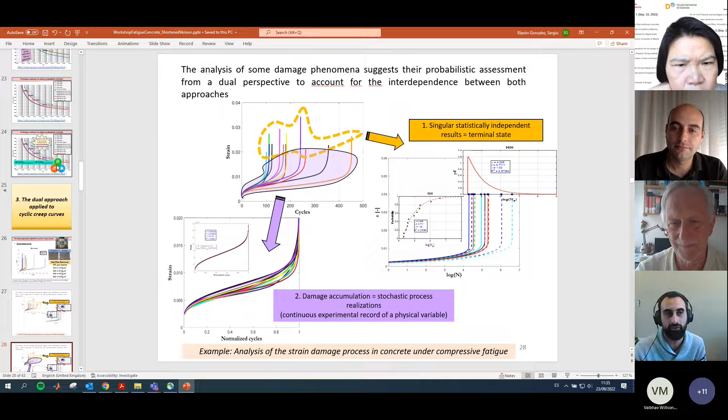I think it's not easy because, of course, we are basically mixing different specimens, ones which are totally broken and some ones which are not. So I assume that it's a difficult issue. But in fact, for example, in the SN program, the one we commented before, let me take advantage of this slide, also because in the model is also implemented the information from the runouts. And in some way, this model also is able to try to estimate the number of cycles that we could expect in the runouts. Which means that we are doing exactly more or less the same kind of analysis here, even in the SN model.

So I don't know if Alfonso has some kind of comment on that. I don't know, it's there, right? And another problem, it's similar to what Gonzalo Ruiz has said before. When I have observed in many cases of runouts that the epsilon n curve changes its behavior because of this fatigue maturation that we are observing. So as the material is evolving, the material properties are changing. That's why all the curve also changes, and it doesn't follow this homogeneous shape of cumulative distribution. Okay, well, thank you.

May I make some comments about the question? First, if you are only interested in the prediction of the lifetime, then you are referred only to the estimation of the NF, the final number of cycles. So if you have some results, you have the distribution of this NF, so that practically you can predict which is the lifetime for the next specimen. The other question is, if you want, additionally, to know how is the evolution of the damage in a possible future test.

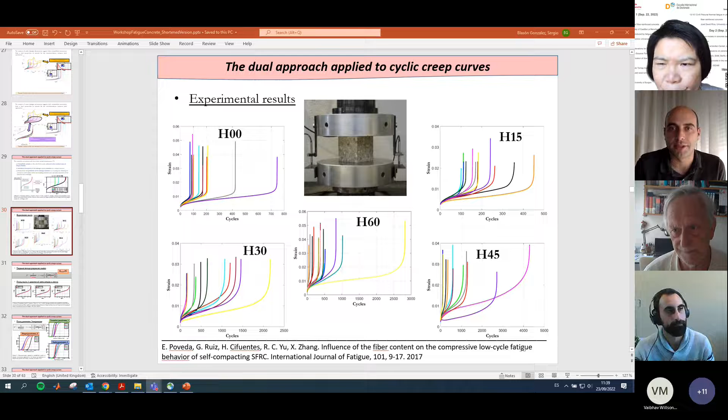I first of all thank you again for all your 3 presentations today. They've been really good and really insightful. I have, as a professional, a principal engineer in the United Kingdom, and we've done a lot of work with foundations for wind turbine foundations.

So I have a query for Carlos Rios on the last presentation, which has been really good. Actually, I think it's not just been on Eurocode, but put together with the different codes we use, Model Code 2010, 1990. So my question was with respect to Eurocode 2. Carlos, are you there? I am.

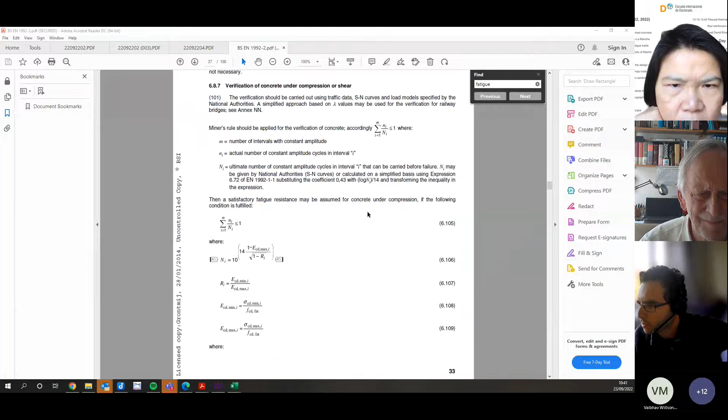In addition to the fatigue formulation on Eurocode 2 part 1.1, on Eurocode 2 part 2, which is used for bridges, there's also a section. I can share my screen if you want. On this bridges code, there's also a formulation for calculation of fatigue damage on concrete using the Palmgren-Miner rule. And as you mentioned, the fcd,fat is changed, this is 250.

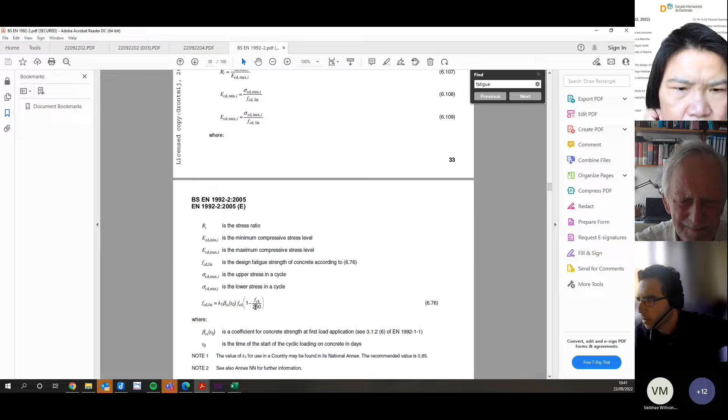So my question will be, will we be able to use this formulation but with a new revised fcd,fat, or is this totally separate? Do you know? It might be that because this is a different code, nothing has changed. No, it's the same.

Okay, but when I was saying that the shape of the SN curve was kept, is that there are no changes in the SN curve and you only have to change the definition of fcd,fat? So all the curves, that formula is absolutely the same. Okay, so that won't change.

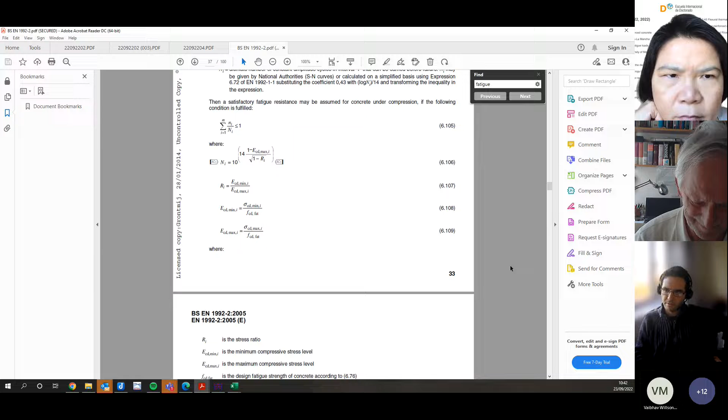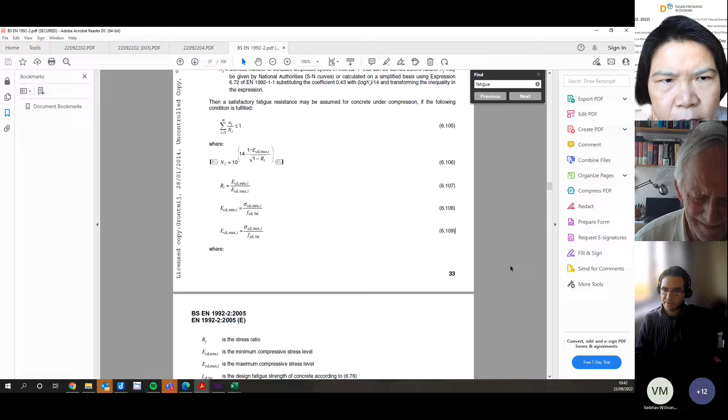Okay, that's really good. I mean, I totally agree with all what you say. Previously I used to work in Spain also with some precast concrete towers, and on all the foundations we've done here in the UK, we are aware of how conservative some of the approaches, such as Eurocode 2 and Model Code 1990, were. So I'm really happy to hear that the industry is moving forward in that direction. Okay, glad to hear that.

Because I think there is an improvement. Of course, as Rena said, the distance from codes and research is, I think, excessive. I do agree. But what we have right now, we can change that. So this little step, I think it would be better for sustainability, reduction of material, savings, etc.

I do have another question, but I think I know the answer to that. Again, for you, Carlos, I assume that this new research on concrete strengthening under fatigue is not included in Eurocode 2 or any code. What is the new... on Gonzalo's presentation on day one, when he mentions this phenomenon of concrete increasing the strength under fatigue.

That is not included. Let me say that every colleague working with me in these working groups, etc., are very good professionals and very good, wise engineers, but that increase of strength because of fatigue, it's going to be hard to put it in the code. Yeah, no, I expect so. And I do not agree, because it makes no sense that people are researching or testing and demonstrating and proving their results, but the standards, the codes, etc., are conservative.